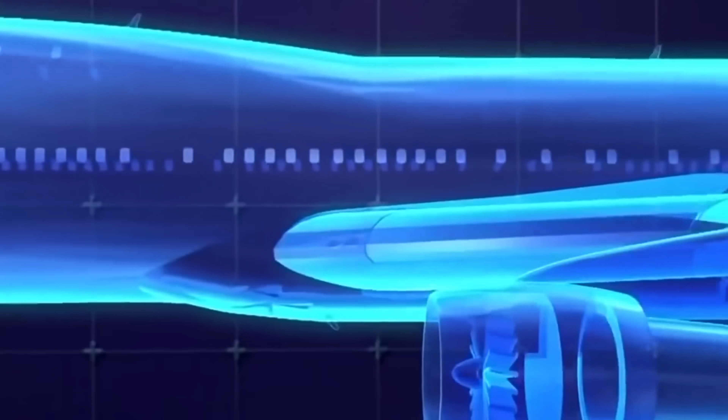However, what the crew didn't know was that the air conditioner was causing the fuel tank under them to become increasingly warmer, to the point where gas vapor started to form. Jet fuel in its gas phase is extremely explosive and flammable. The jet engine fuel had reached a temperature of 53 degrees Celsius, while its flash point is 38 degrees Celsius, turning the fuel tank into a large bomb just waiting to be triggered.

As you probably know, there are countless wires throughout the entire aircraft, including inside the fuel tank. If this wiring is well insulated, there's technically no problem. However, this was not the case. The wiring in the entire aircraft, including the fuel tank, was in poor condition. At 8:30, the captain suddenly reported, "Look at that crazy fuel flow indication on number 4."

Do you see that? But he didn't pay much attention to it and returned to his usual duties. This was the last communication from TWA 800.

And then it happened. At an altitude of 13,800 feet, a short circuit occurred in the fuel tank. A spark ignited the gas vapor and the aircraft exploded like a fireball. Due to the enormous pressure of the explosion, the aircraft broke into 2 pieces within 4 seconds.

The cockpit broke off and dove into the ocean, while the back of the aircraft continued to fly. The rear part of the aircraft, due to a change in center of gravity, first made a dive upward before beginning to free fall towards the Atlantic Ocean.

Air traffic control scrambled to establish contact with TWA Flight 800, desperately seeking information about the unfolding emergency. The distress call from the crew indicated a catastrophic loss of control, leaving no room for hope. When it happened, the captain of Eastwind 507 witnessed the explosion and immediately reported it.

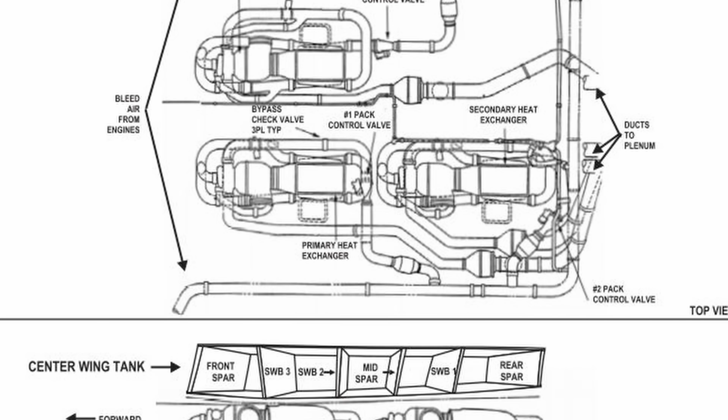The report emphasized several factors, including aging wiring, the presence of flammable materials, and electrical sparks as contributing elements to the explosion. The design features of the Boeing 747 led investigators to the idea that the fuel tank was heated by the air conditioning system located below it. To create a comfortable atmosphere in the cabin, the air conditioning units extract hot air from the engines to produce cooler air that is then distributed throughout the aircraft.

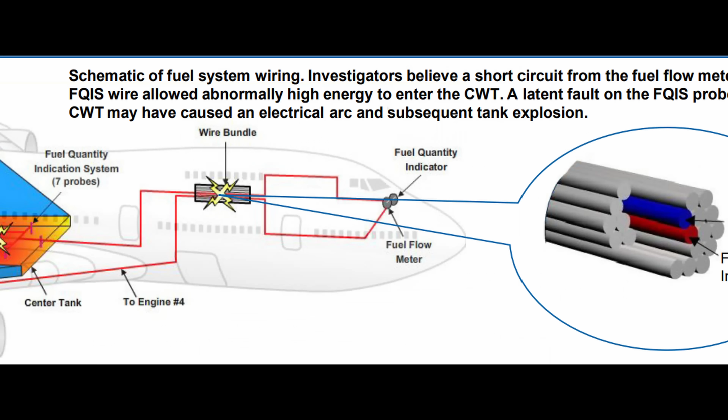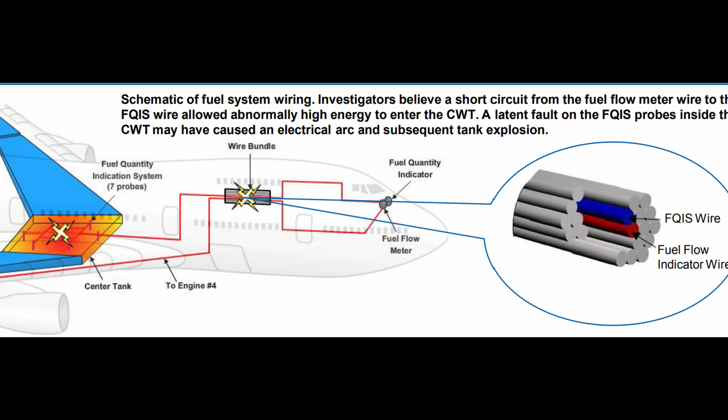Researchers believe that the fuel present in this tank was heated by this air conditioning system to the point where it began to vaporize. The system had been active for over an hour due to the delay of the aircraft in New York. In this gaseous state, aircraft fuel is highly flammable and explosive.

As part of the investigation into the disaster, a test flight was conducted, simulating the conditions in the central fuel tank, registering a temperature of approximately 53 degrees Celsius. For reference, the flash point of jet fuel is around 38 degrees Celsius. The fuel tank had effectively been turned into a massive bomb just waiting to be activated.

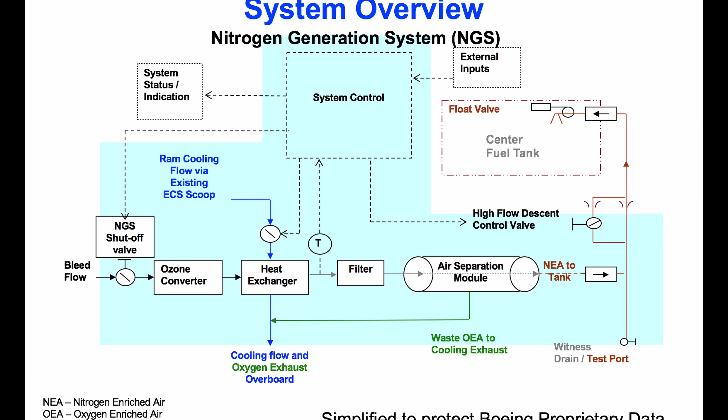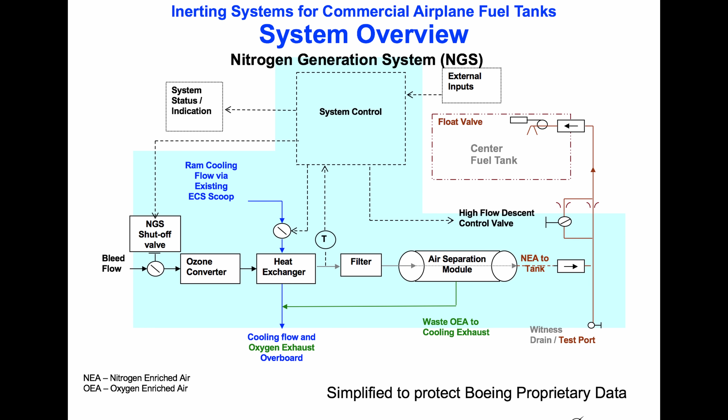Despite the controversy, the tragedy of TWA Flight 800 had an indelible impact on the aviation industry. It led to significant changes in safety practices in aviation, prompting the sector to review and enhance fuel tank safety measures. The introduction of fuel tank inerting systems, NGS, has reduced the risk of similar incidents, making aviation safer for passengers and crew. It's important to remember that tragedies like the crash of TWA Flight 800 have lasting consequences. The lessons learned from this disaster have shaped the aviation industry's commitment to safety and have led to ongoing advancements.